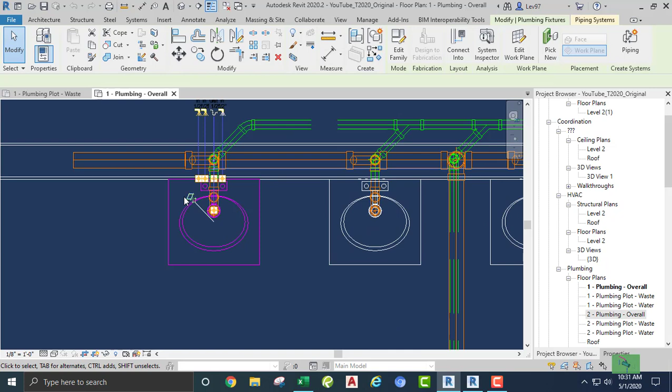So let's do hot water. We have here, and our hot water is always on the left side, usually, right? And the cold water is on the right side, usually. I think I'm gonna change this to 3/4 inch, but no, you know what? I'm gonna leave it at a half.

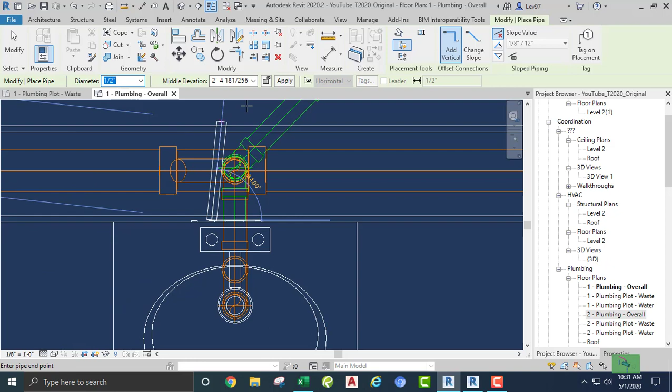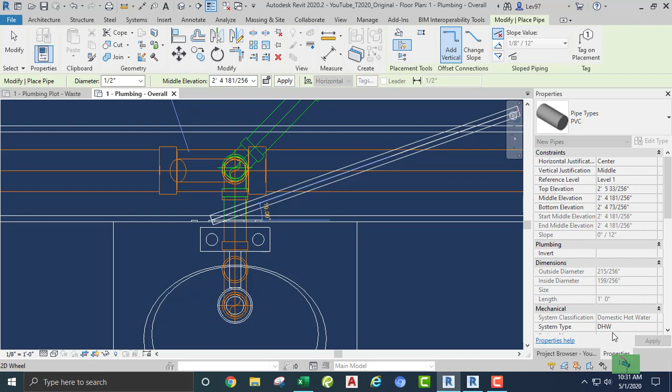Doesn't matter. It's just routing stuff. You can change it to whatever. Usually it's 1/2 and then the 3/4 inch. But I'm gonna leave it there. Make sure there's no sloping on my water piping. Since I'm using hot water and cold water or water systems, the slope is gonna be 0. PVC pipe is good. So the system type is good.

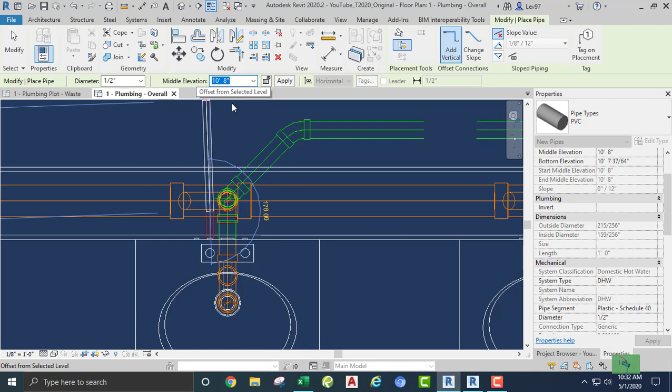Hot water. So we can come up, say here, and the hot water is going to go up in the ceiling at 10 foot 8 inches. Okay. So I'm going to go up in the ceiling, leave enough room for the cold water also. But the cold water is going to be at a different elevation. So we go here, and now we can get the cold water.

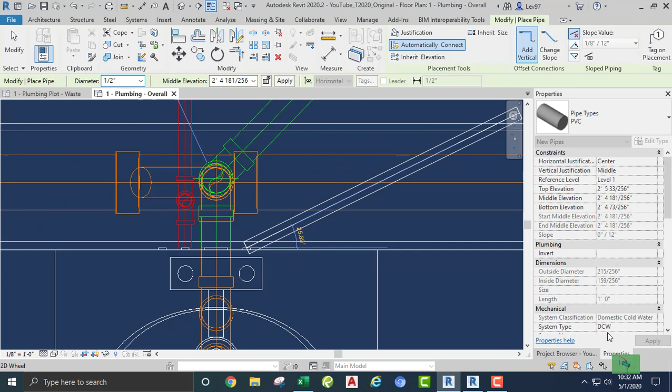Okay, so here, piping, 1/2 inch. We don't care. PVC, domestic cold water, and we can go here first because the middle elevation off of the fixture is 2 foot, right? So we go here, make sure we're not interfering with any type of pipe or fitting or whatever's down here, right?

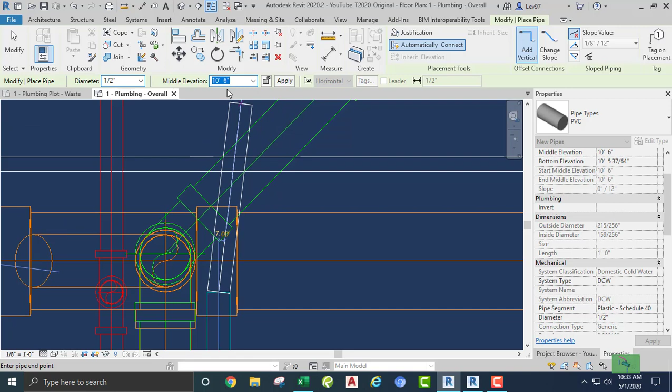So if you see something like that, that's an interference. So I would not bring the pipe up here anymore, that's an interference. If you see the blue highlighting, that to me is an interference. So somewhere down here, I would click and make sure that everything's good, and now change the offset, which is a different elevation. So we're gonna make the cold water 10 foot 6, okay, coming up into the ceiling.

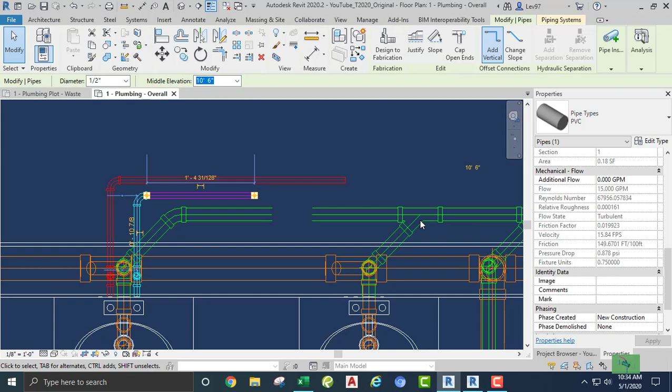And we're gonna run it about right here over, okay, and make sure that our fixture units are being counted, because that's always important in piping, plumbing. Fixture units 0.75. Fixture units for the cold water 0.75. Okay, so with this we can do the same thing.

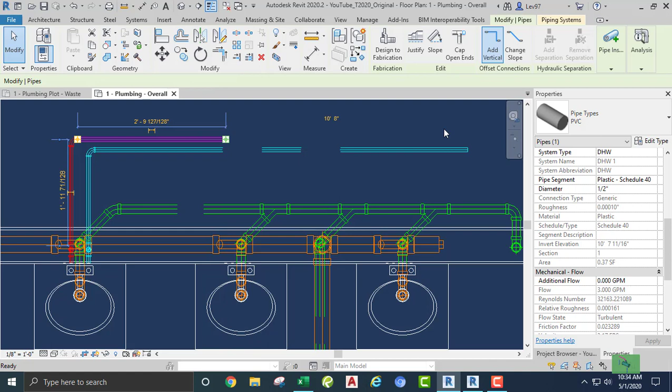If we are going to pipe this up, and give us enough room, well, you know what? Okay, I'm gonna keep both these systems at a 1/2 inch. Okay, just because.

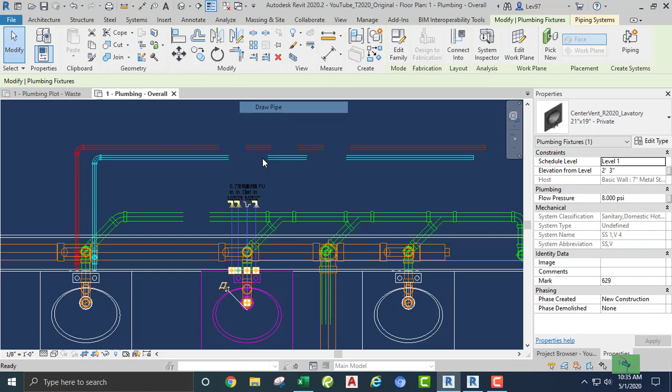Okay, now we can look at these drawings and see how easy it is to keep in mind what's going on, right? This can change, of course, to whatever it is, but because there's a fitting back here of a 1/2 inch, it's better to change it at something small, but I'm going to leave it at that. And just to keep an account of what's going on,

you can come off of your plumbing fixture, right, and then change it, you can go down here. You can scroll up and down or whatever. But I like to type it in 10, 8, right? 10 space 8 will get you there. These look like they're okay. But let's just take a look and see. I'm going to just keep that one here.

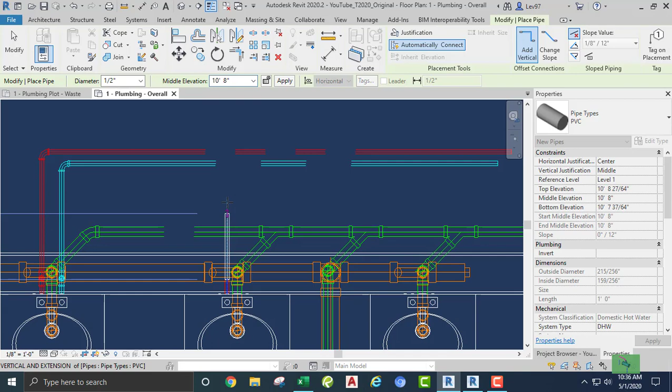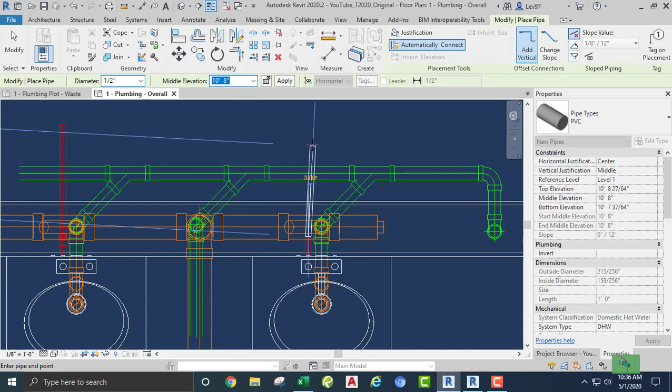Come over, because it's the same system, I'm going to continue and be consistent with my systems and come out at that level, come up in the wall at that level, and then change it to an offset in the ceiling here. Okay, and do the same for cold water.

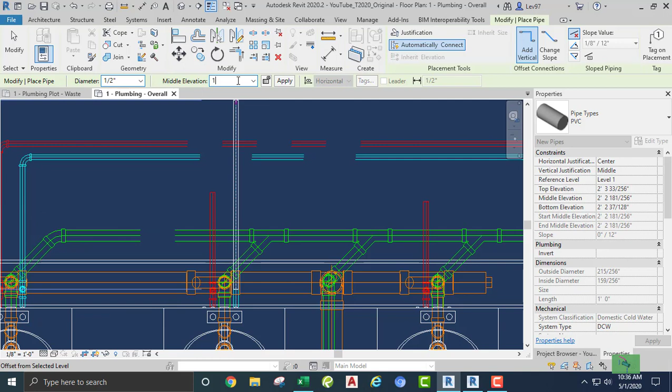The only reason I'm doing it like this is so that you can see how once you understand and get a feel of what it is that you're doing, it's kind of easy to see how these things can work out.

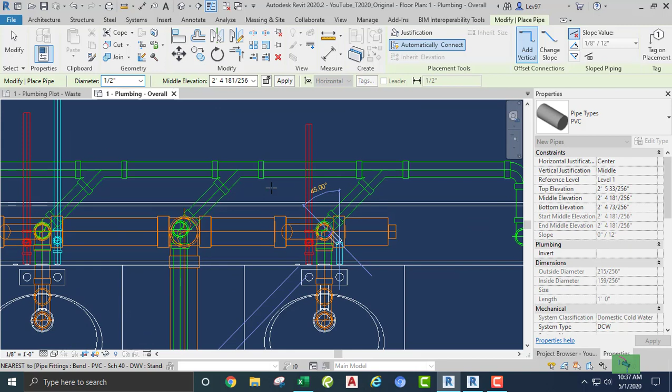Okay, so this is my last cold water, and go here. Okay, I usually check, but 10, 6, right? And we go up here. And now let's check our fitting. Make sure that we are using the correct fitting.

Now, is that a bend? I think I want the bend with no ticks. Okay, bend with no ticks, yeah. Okay, so you see, let me go over this. I'm gonna do a bend with... this is a bend with ticks. Okay, so I'm gonna cancel this and use a bend with no ticks, which is this bend and that bend.

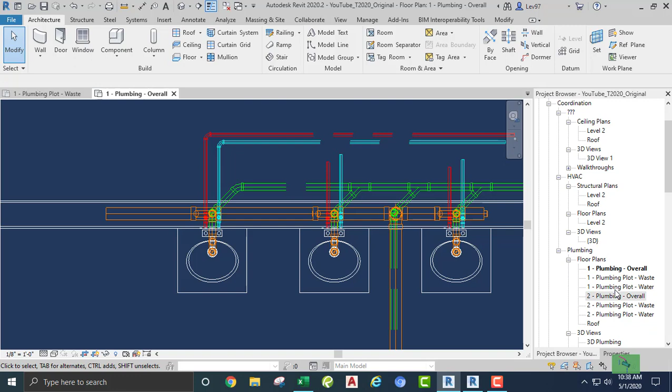And let's go to our first floor water. Okay, so you have to have that. This is a plot view, and you have to have water. Okay, so let's look at now. A lot of times in CAD drawings, we don't use this type of stuff, which is the reason why I don't like these ticks.

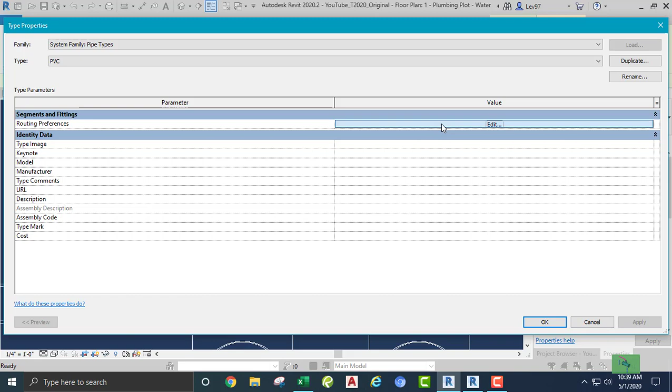Which is the reason why we go to our properties of that particular system, right? And we want the routing, or the pipe that we want to route, how the pipe is being routed. What pipe type do we use? Do we use a bend, or do we use a junction? What type, right?

So this bend comes from Autodesk, or it comes from Revit, but you can create them without a tick mark, but you have to look at the information. So anyway, this bend that I'm using is not a download from any service. It's just something that can be made, and it's not Dynamo either. Just look at it. So anyway, I'm just saying that I would rather have no ticks.

If you are struggling with tick marks, and you know that they didn't used to do it like this in AutoCAD, or it depends on the manager, or if somebody says, well, we like ticks, then you at least have an option. Sometimes ticks are good if you're having a long pipe and you want to just show that, but I've never had a good use for them, primarily because of doing AutoCAD, we just never used them. And because we have Revit now, we can use tick marks.

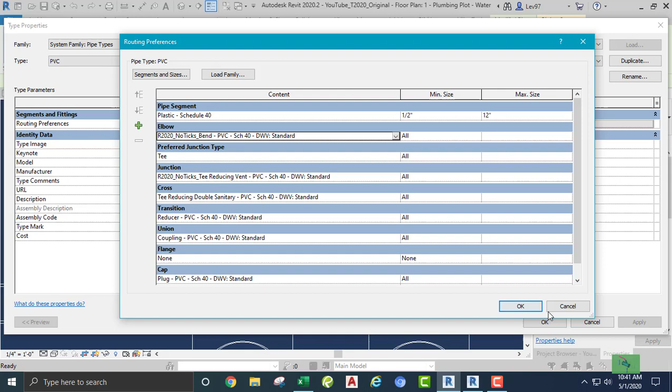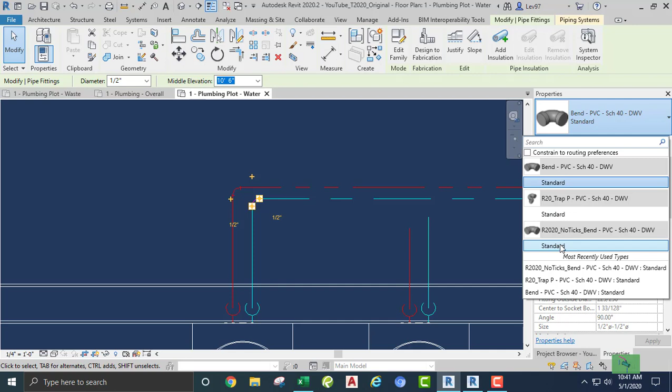And do this. So the next time, let's change this. Or what we can do, since I'm here, we can highlight this guy and say, I don't like the ticks, right? I don't want this one, I want this one. So we change it out, right? So there's no ticks in here anymore, and it looks like it does in our familiar AutoCAD. Yeah,

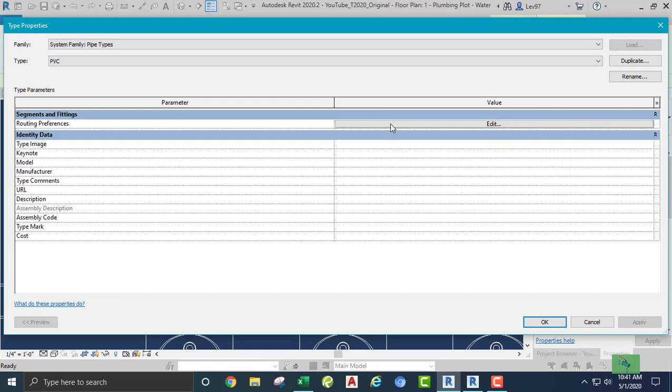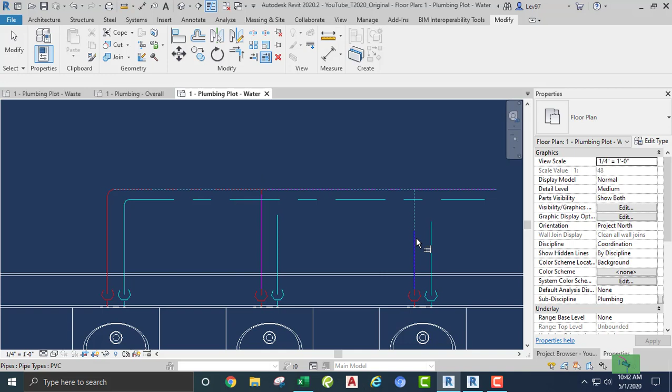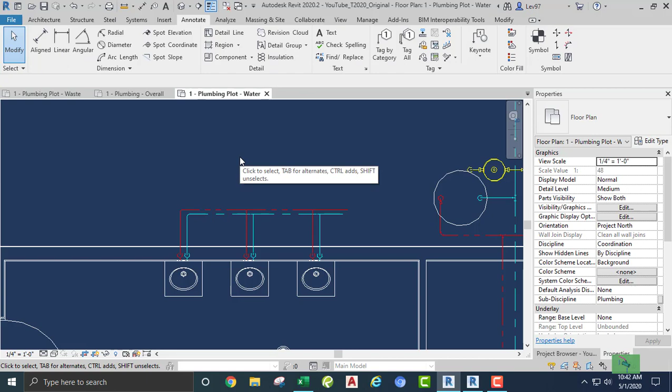And then, with this being the plot file, right, you can annotate it by category. It's not a text. This is text, right? You see that difference? Text is this, text, right? Doesn't have anything to do with anything. I mean, it does, but it is not a tag, and a tag is something that will identify something. Well, no, here.

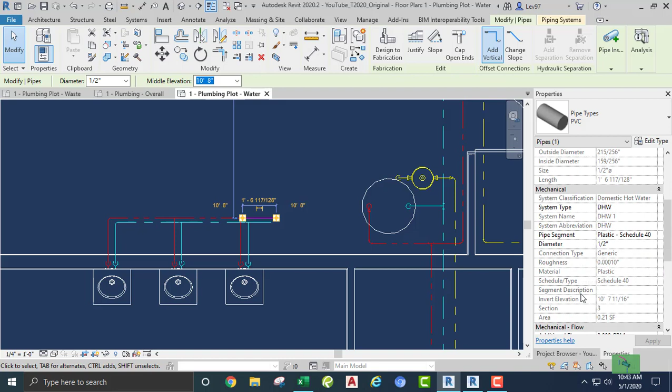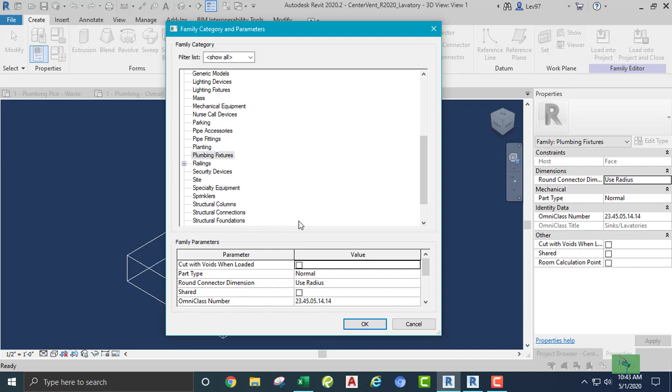Here. A tag attaches a tag to an element based on the element category. So what is this element's category? Well, I know that if I look at this family and go up here, right, this family can be a category. So the pipe fitting, based on a category. There's no pipe. There's a fitting category. So let's go back. Okay.

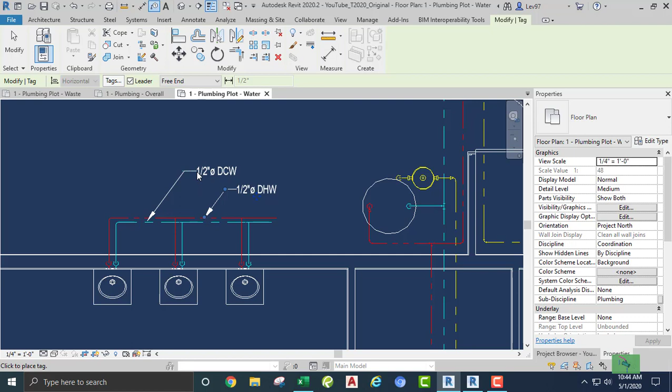Anyway, you know what? It attaches a tag to an element based on the element category. Okay, so I said that because it's a tag, and I know that a tag can differentiate between one system and another. Cold water, hot water.

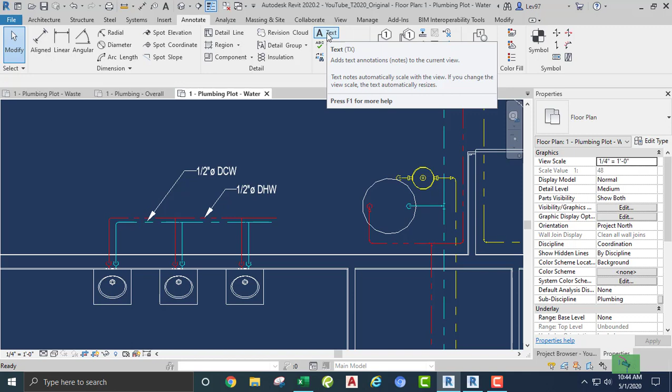So a text adds text annotation notes to the current view. It just adds it. Text notes automatically scale with the view. That's if I change the scale, right? And what else is it saying? If you change the view scale, the text automatically resizes. Wonderful. So these tags attach a tag to an element based on the element category. So what's the category of a pipe?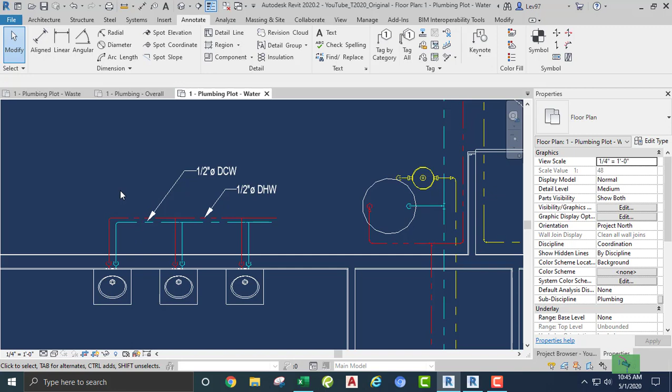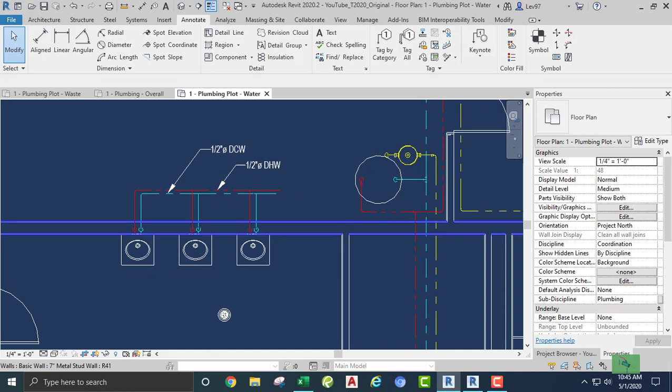Anyway, you can do that. So that's another subject, I guess, which, you know, you have to do a lot of research trying to figure out. Really? Category, and then you go to the categories and there's no pipe. So what does that mean? Anyway, so that's the hot water and cold water.

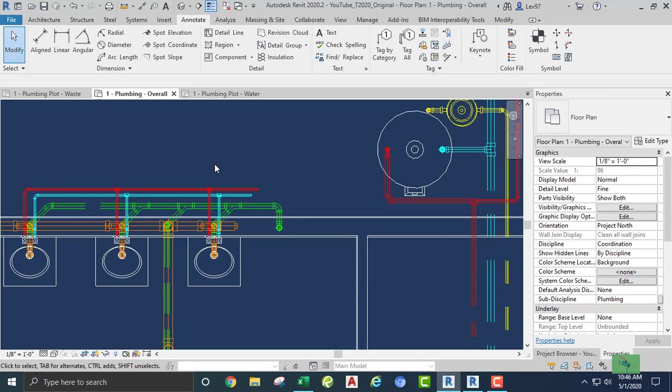Let's go back to the first floor and look at that, and we can say that we can kind of close these guys, just in case they have to hang it. I guess they do that kind of thing. Let's see, what else have I got here? I know that I'm gonna need some hot water return, and that's this yellow pipe here. Okay, so I can hook my hot water return pipe, right?

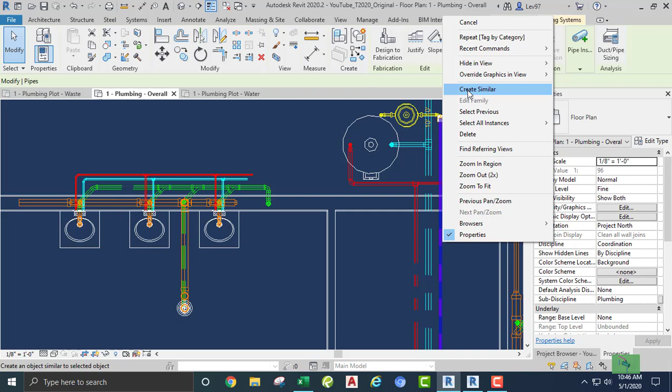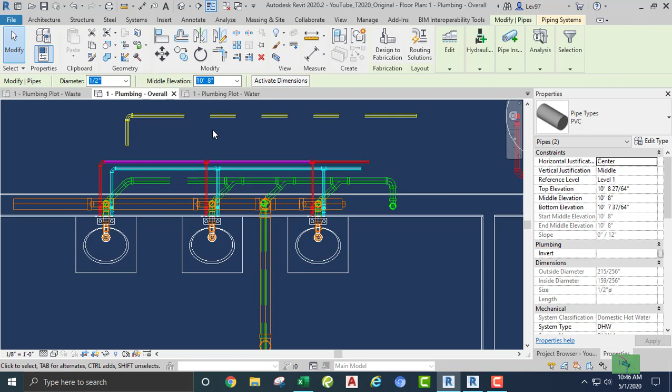I can say here, create similar, and say from here, and go over. Now let's test it. That's a 1/2 inch here and 3/4 inch. So usually this pipe, let's change it. I'm gonna make this the same pipe. I'm not gonna get into a whole lot of design work. So that's 1/2 inch, right? But it comes off of the hot water pipe. You can, if you want to. You can do whatever you want, but sometimes it works like that.

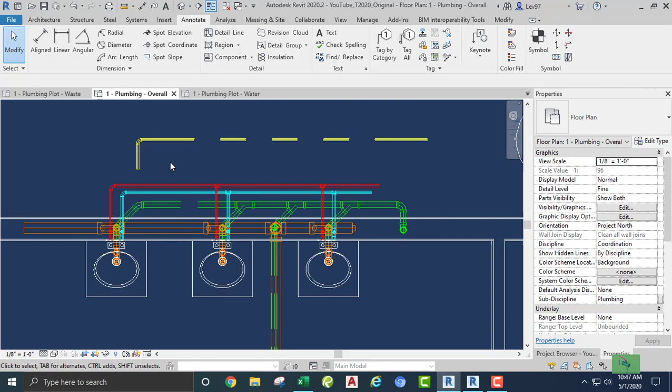Sometimes you feel like a nut, and sometimes you don't. Well, how does it go? Almond Joy has nuts, Mounds don't.

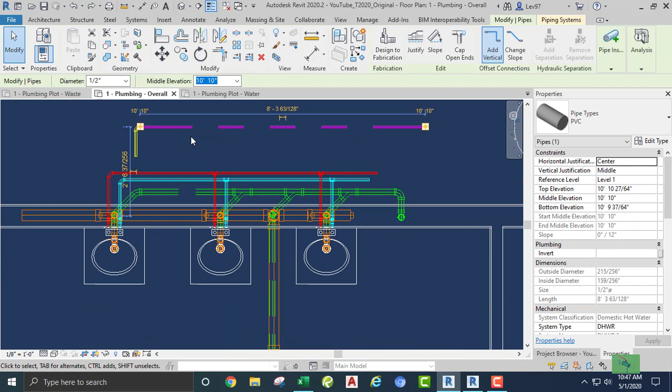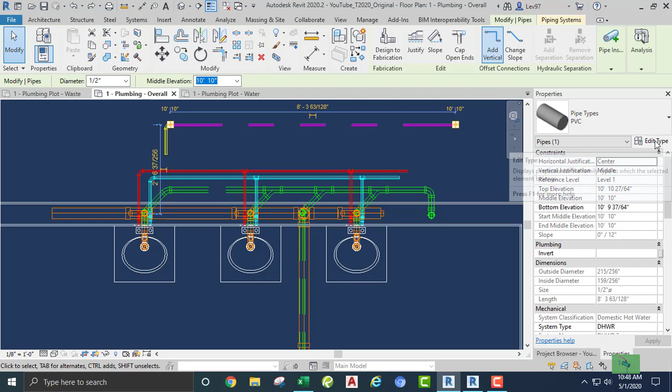Okay, so you see what happened? It's at a different elevation. So let me go back and change the elevation to what? That's the 10-foot 10, right? Do I want to do that? No, because I'm gonna mess up the fixture units of the hot water, right? If I connect it in here with that different system, what is that system? That system is a hot water return. This system is a hot water system, right?

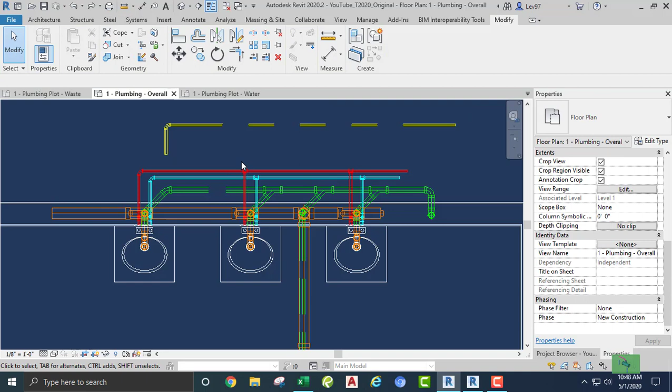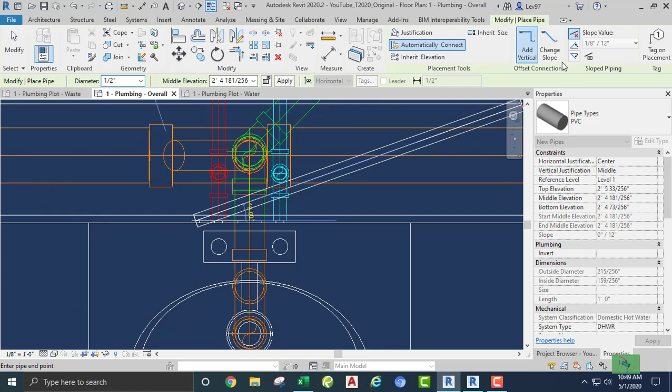And it has 0.75 fixture units, right? And if I hook anything up to it, guess what happens? Boom, boom. Well, I know that this might have to be closed or blah blah blah. But anyway, let me go back. So the fixtures have to have also a vent on it. This is a hot water return, and it's gonna go up 10-foot 10. Right now it's okay. That's a hot water return that's coming off of the fixture.

Okay, don't put it on the pipe. I know it goes on the pipe in real life. But this is not real. None of this is real. None of it. It's all fake, guys. It's all fake. Okay, so anyway, let me come back to reality.

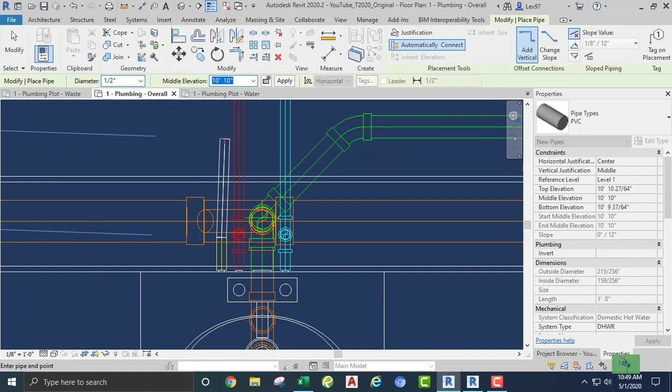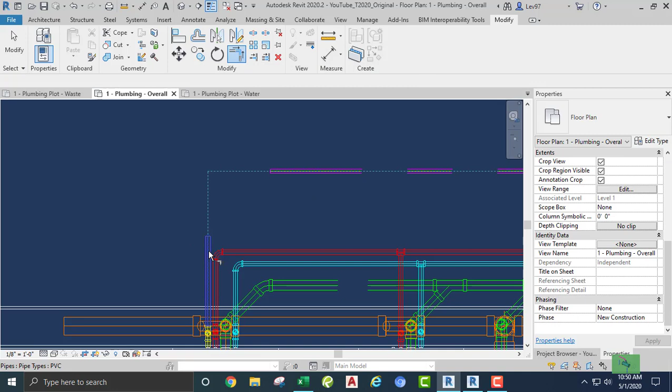So that is hot water return, and then I go up 10 foot 10 inches in the ceiling to connect to my hot water return, right? Because we have to have that going back to the pump. Okay, and everybody's happy. There's fixture units coming out of the hot water. What else? Let me close this guy up. Do I need fixture units? I don't think I need fixture units for the hot water return. No, I don't need fixture units.

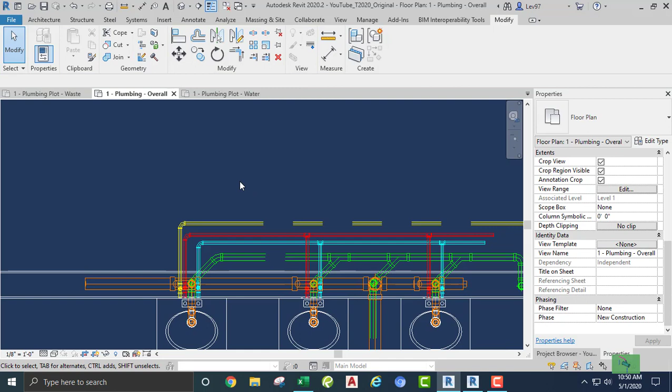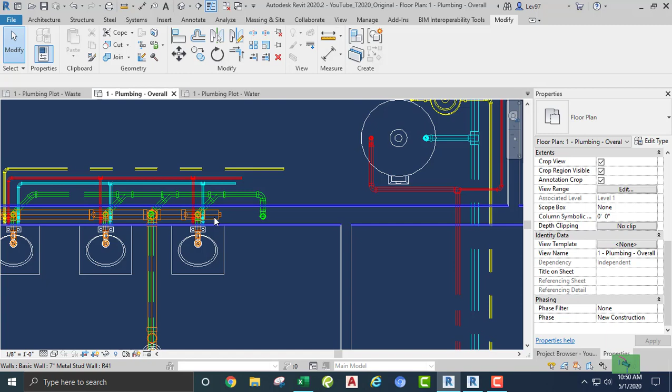But you usually have to keep the velocity at, I don't know, 2, maybe 3 feet per second. All right, just keep it under. Just do what the engineer says. Okay. And so we got hot water return, hot water, cold water, vent piping, and last but not least, sanitary sewage. Right? 1, 2, 3, 4, 5 systems. That'll get us nice and clean coming out of the bathroom.

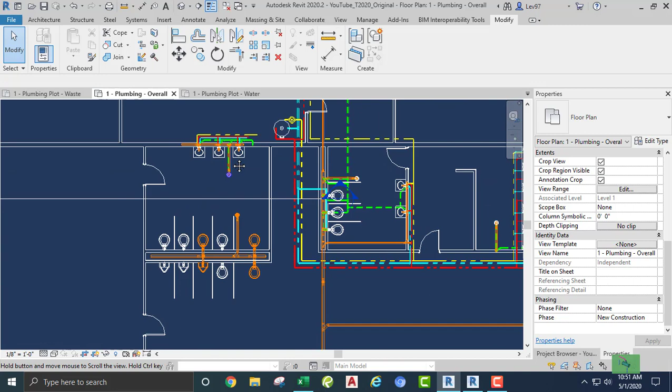So I think that's the basics, right? So I'm going to stop here so that next time we can maybe copy everything up to the second floor, or maybe copy on the first floor from this group of elements to this side of the restroom, because this is the men's side, this is the women's side. Or is it? I can't have it like this, can I? Why is this like this? I guess I need to change something.

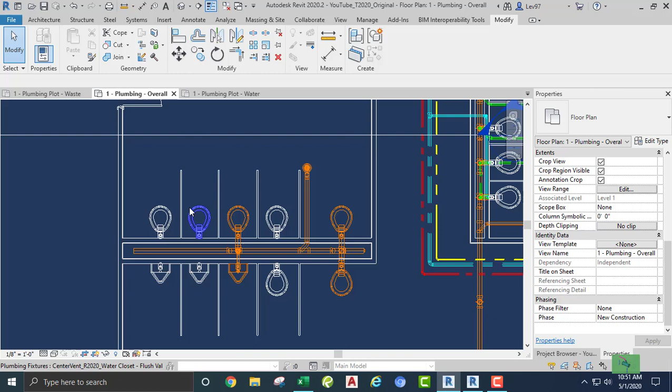Got urinals on this. So okay, this is the women's side, this is the guy's side. Where am I? Man, oh man, let me copy. Men's room. Okay, I'm just copying this. Men's room.